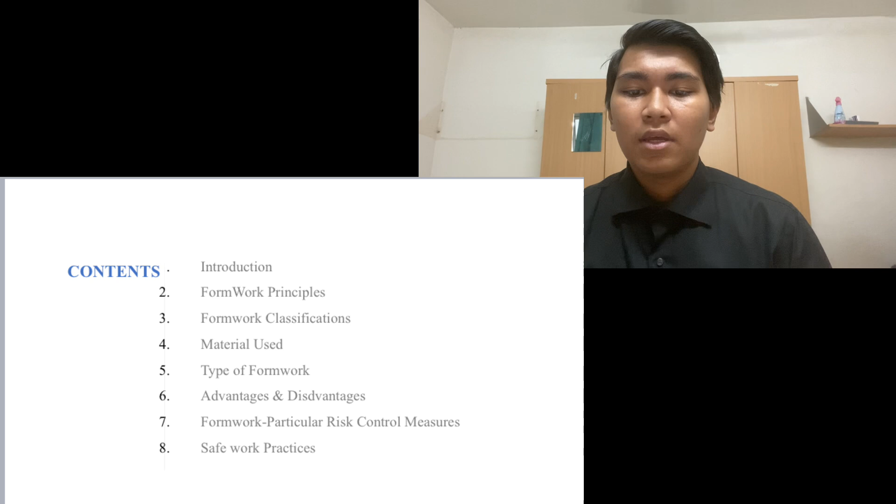So today I'm going to present to all of you about formworks. The content that we have in this presentation is: number 1 is introduction, number 2 is formwork principles, number 3 is formwork classifications, number 4 is material used, number 5 type of formwork, number 6 is advantages and disadvantages, number 7 is formwork particular risk control measures, and the last one, number 8, is safe work practices.

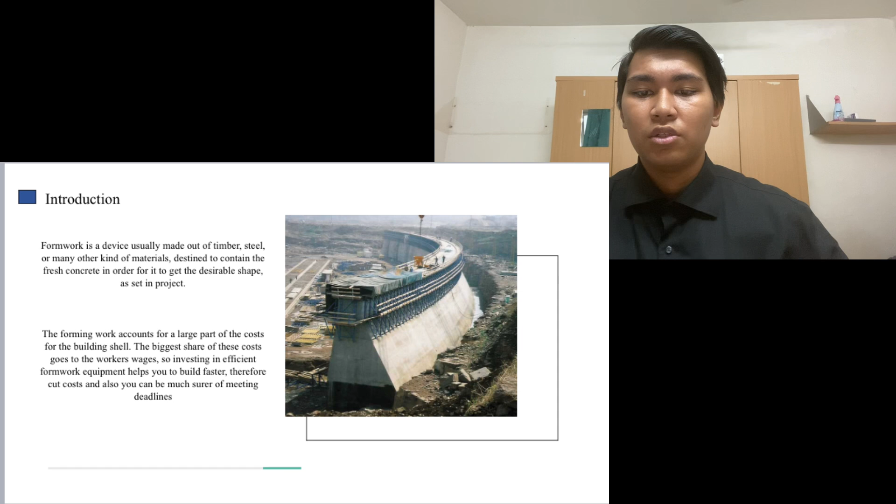Okay, for introduction, formwork is a device usually made out of timber, steel or many other kinds of materials destined to contain the fresh concrete in order for it to get the desirable shape as set in the project. The formwork accounts for a large part of the costs for the building shell. The biggest share of these costs goes to the workers' wages. So investing in efficient formwork equipment helps you to build faster, therefore cut costs, and also you can be much surer of meeting deadlines.

So for function, formwork must contain fresh concrete until it can hold shape, support fresh concrete until it can support itself, keep water in the mix until hydration occurs, and create a work platform for workers and plant.

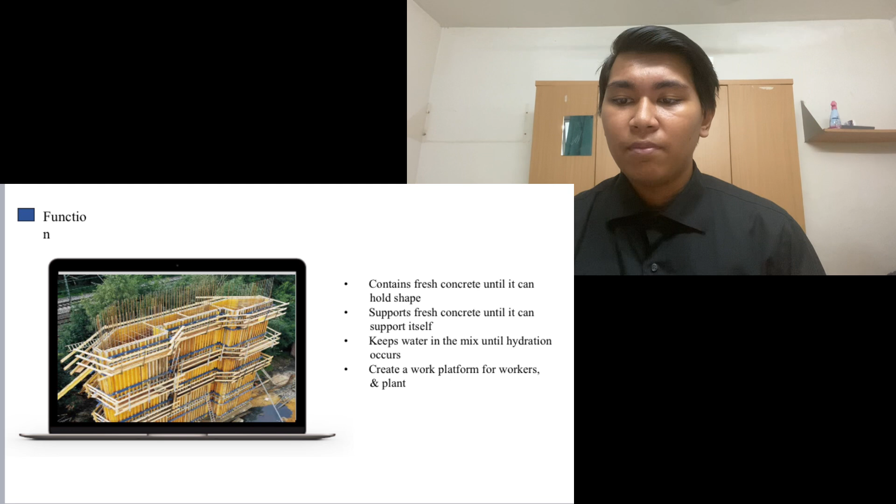Formwork principles, basic requirements. Forms must be strong enough to withstand the loads, rigid or stiff enough to maintain their shape and to prevent excessive deflection during the placing and curing of concrete. Joints in forms must be tight enough to prevent wet concrete, water and cement paste from leaking through. Forms must be as simple to build as circumstances will allow.

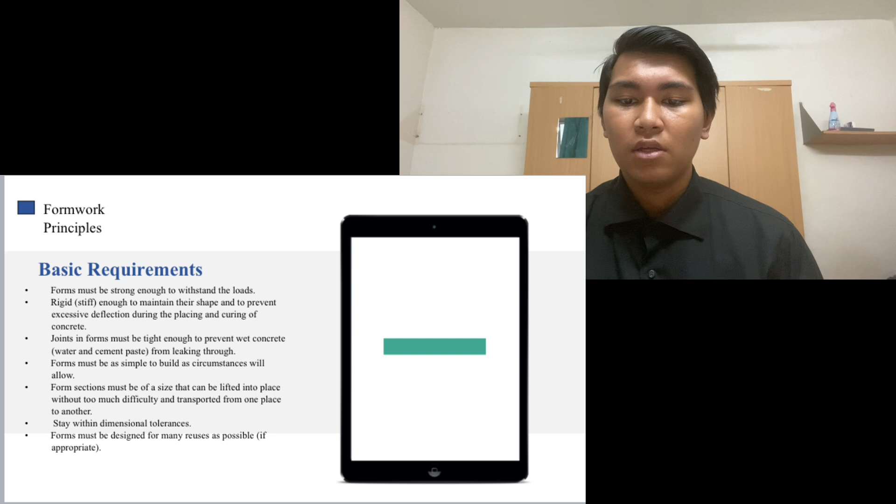Form sections must be of a size that can be lifted into place without too much difficulty and transported from one place to another. Stay within the dimensional tolerance. Forms must be designed for as many uses as possible if appropriate.

Requirements for formwork. So for reusable, it can be used more than one time for the same repeated dimensions. Possible to be dismantled, which is easy to disassemble the formwork components. The third one is economy, which considers construction, labor, machine and material costs. Withstand safely all the loads, like gravity load, wind load, dead load and other loads.

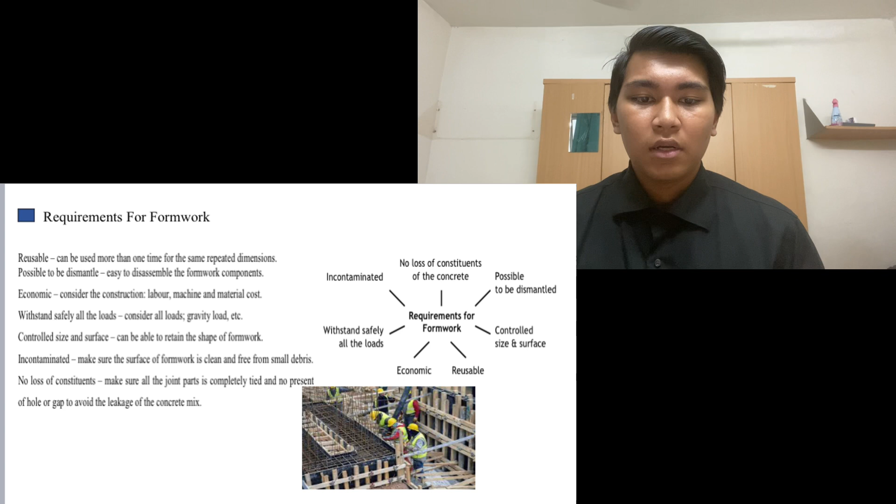Control size and surface, able to retain the shape of the formwork. Uncontaminated, which is making sure the surface of the formwork is clean and free from small debris. No loss of constituents, which is making sure all the joint parts are completely tight with no presence of a hole or gap, to avoid leakage of the concrete mix.

Formwork classification: there are different ways to classify the formwork system. Number 1 is traditional versus modern system, old stick-by-stick versus innovative approaches. The second one is reusable versus lost form. Lost formwork forms part of the permanent structure and by definition can only be used once. Examples are precast panels, steel tubes, Bondeck and other things.

So the last one is static and movable climbing forms. Movable or climbing forms relocate themselves to the next location using an integral power source. Examples like slip form or jump form.

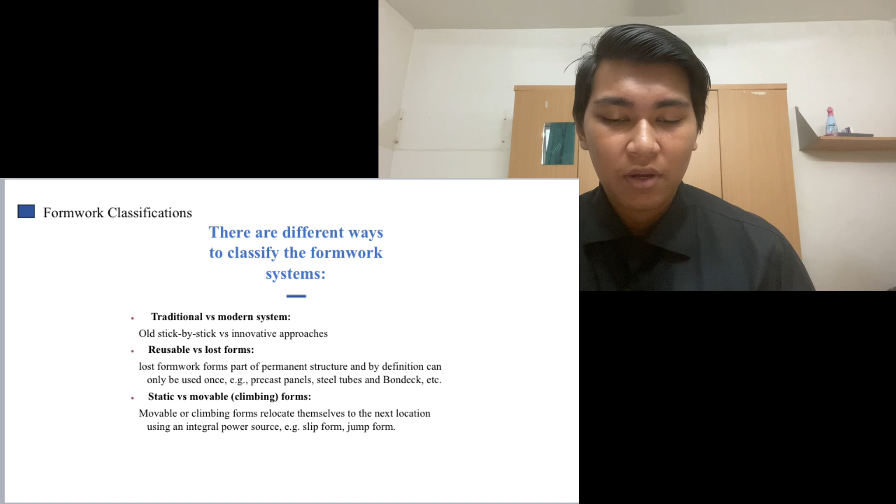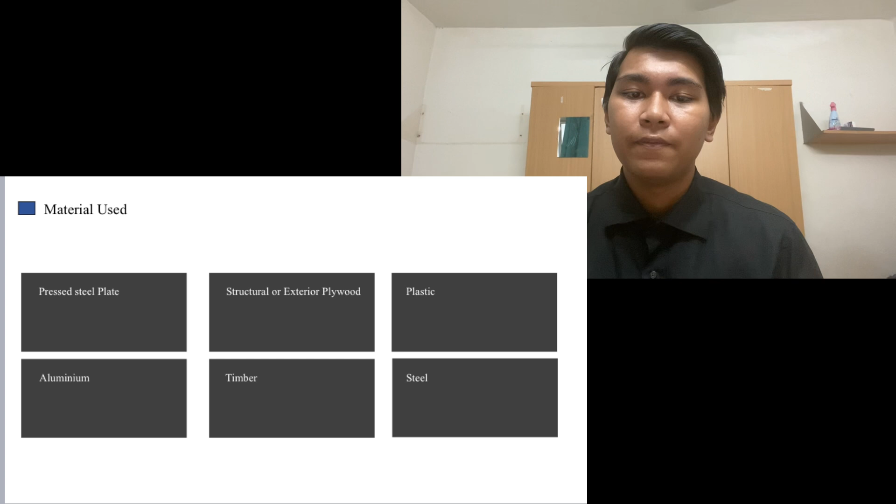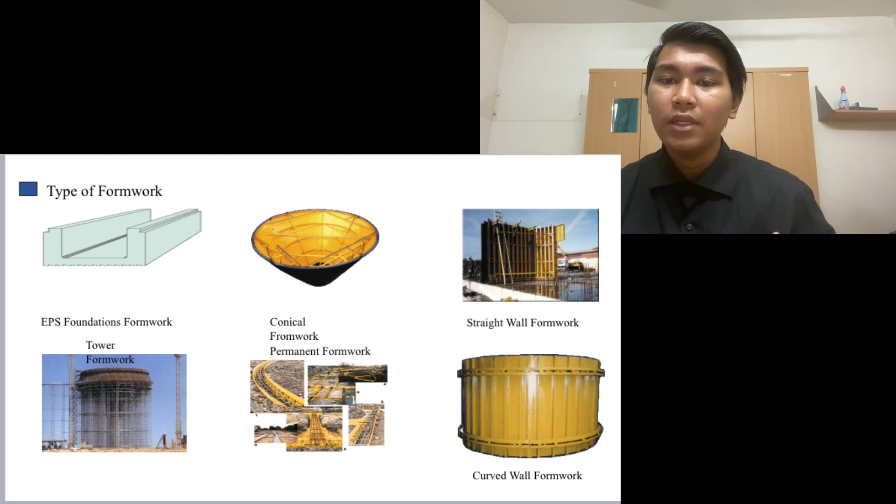Materials used for formwork are pressed steel plate, structural or exterior plywood, plastic, aluminium, timber and steel. So there are a lot of types of formwork. We have EPS foundation formwork, conical formwork, straight wall formwork, tower formwork, permanent formwork, curved wall formwork, column formwork. We also have complex formwork, and also elliptical column.

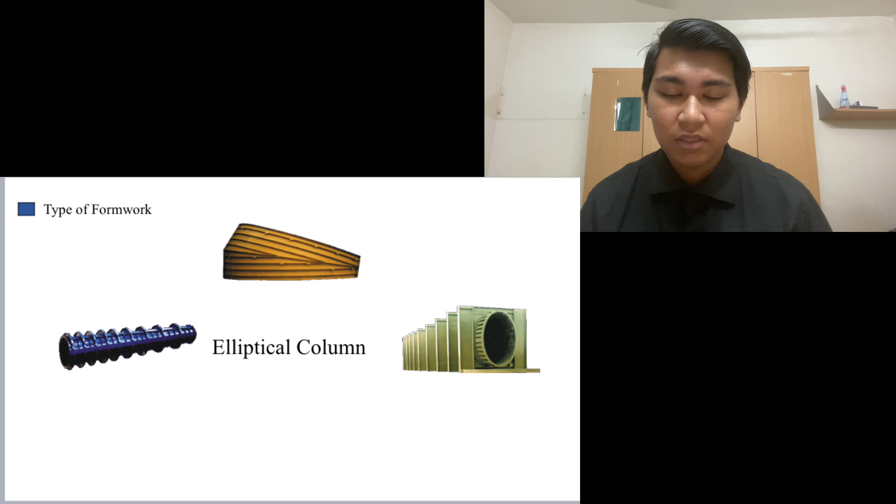Advantages and disadvantages. Advantages: great tensile and impact strength, exclusively mineral without plastic addition, fire resistant classification A1, reduction of the carbonation depth, unidirectional reinforcement, optimal integration with the concrete, the same strain behavior as normal concrete, perfect concrete protection, smooth and closed surface or on-demand specified surface structures, and also cost reducing and economic.

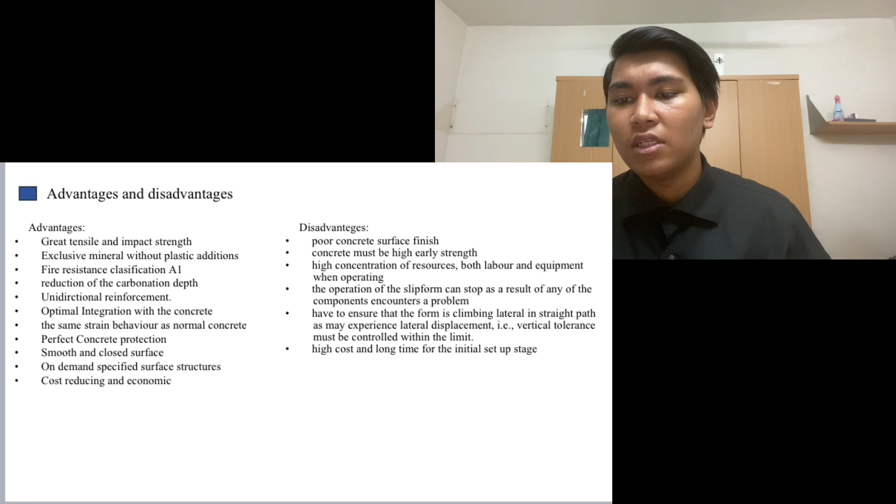Disadvantages for the formwork: poor concrete surface finish. Concrete must be high early strength. High concentration of resources, both labor and equipment, when operating. The operation of the slip form can stop if any of the components encounters a problem. Have to ensure that the form is climbing in a straight path, as may experience lateral displacement. For example, vertical tolerance must be controlled within the limit. And the last one is high cost and long time for initial setup stages.

Formwork particular risk control measures. We have 4. Number 1 is an employer must ensure that formwork complies with AS 3610-1995 Formwork for Concrete. Number 2 is an employer must ensure that formwork is designed, constructed and maintained so as to support safely all loads that are to be placed on it.

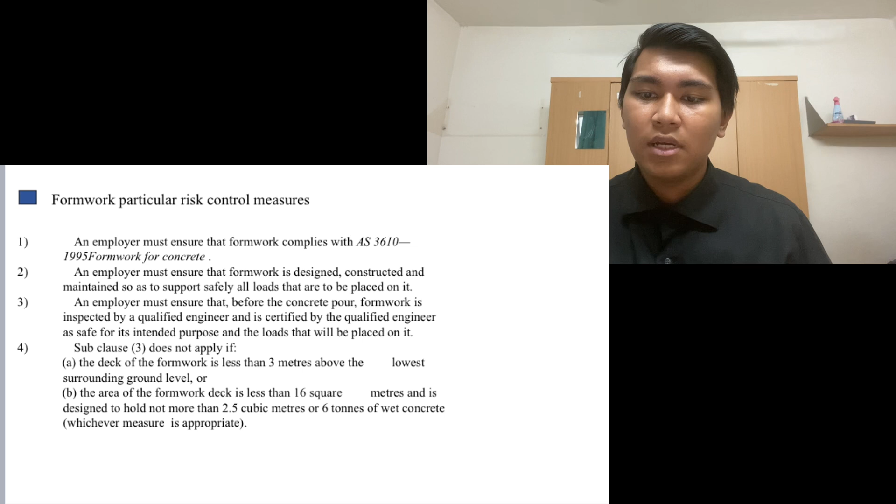Number 3 is an employer must ensure that before the concrete is placed, the form is inspected by a qualified engineer and certified by the qualified engineer as safe for its intended purpose and the loads that will be placed on it. The last one, number 4, is the sub-clause does not apply if the deck of the formwork is less than 3 meters above the lowest surrounding ground level, or the area of the formwork deck is less than 16 square meters and is designed to hold not more than 2.5 cubic meters or 6 tons of wet concrete, whichever measure is appropriate.

So safe work practice, the last one for this presentation. Possible hazards associated with the use of formwork are formwork collapsing, falling from height, falling objects, and hearing damage. Installing formwork: ensure that formwork is not removed before the specified concrete strength is achieved. Install a suitable type of safety screen to enclose the area and to prevent the accidental fall of workers or material.

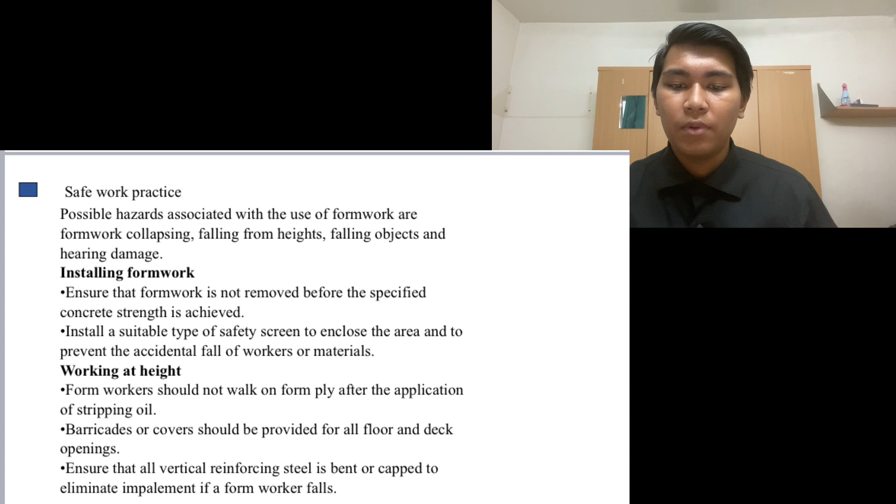Working at height: form workers should not walk on form ply after the application of stripping oil. Barricades or covers should be provided for all floor or deck openings. Ensure that all vertical reinforcing steel is bent or capped to eliminate impalement if form workers fall.